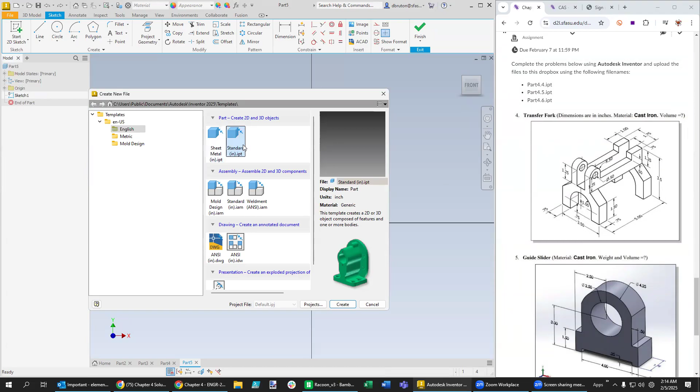So let's go new and English inches, and we'll start with maybe putting the origin right there in the center. So new sketch, select this plane.

And then we'll use the center point arc. We'll lock in at this point, but not click. We're just going to type in 1, that way we can arc over and zoom back until we click into that position.

So that gives a good starting point, and we might even be able to move this off to the side, because what we'll be able to do is maybe draw half of it, and then we'll take a mirror image.

So a way to speed up the process would be to make a line that goes from the top to the middle, like that, and then just make that a construction line we can use for mirror imaging. That's not the right one, it's this one over here.

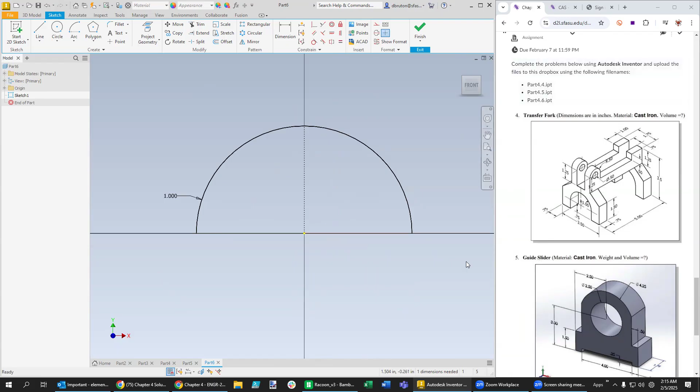All right, so we're going to use that to make a mirror image of this left side. You'll see what I'm talking about, because what we're going to do is roughly sketch it out. It's going to be a vertical line, horizontal. Then this is going to go up a bit and at an angle. And then what we'll do is go up a little bit more, over like this, down, and then we'll stop right there. Let's see if we can take a mirror image of that before we start constraining the part.

And so the way you do a mirror image of a sketch is you go up here to mirror, and it says select the objects you want to take a mirror of. And I'm not even holding control down.

It just highlights them in blue. And it says, what do you want to use for the line? And I'm going to say, select this one right here. And if you apply, it's going to put the other shape over like that.

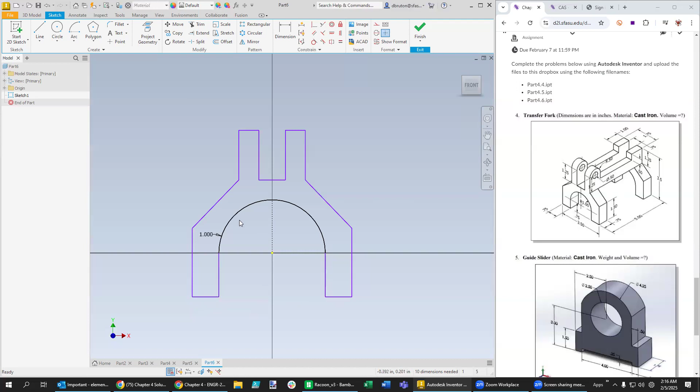So it kind of saves you a little bit of work, perhaps. And we're about to see whether it's going to keep these two equal to each other. So that is to be determined.

Now we already have this distance known from the top to the bottom as 0.75 for the sketch that's right there. And it looks like that lined up well, so that was a nice constraint to have.

We're going to keep these right in this area. I'm going to move this, make sure that it looks like that, move it over here to this side. I'll start adding some more things.

We got 3.5, and we'll see if some symmetry is maintained as we're doing this. It says 3, so we're going to go 3.5, and looks like it did maintain symmetry throughout the whole thing.

So then the next thing we're going to do, see this right over here, is maybe change the number of digits. So what you can do is tools, options, or probably better to be just the document properties under units. And we'll just use 2 places past the decimal.

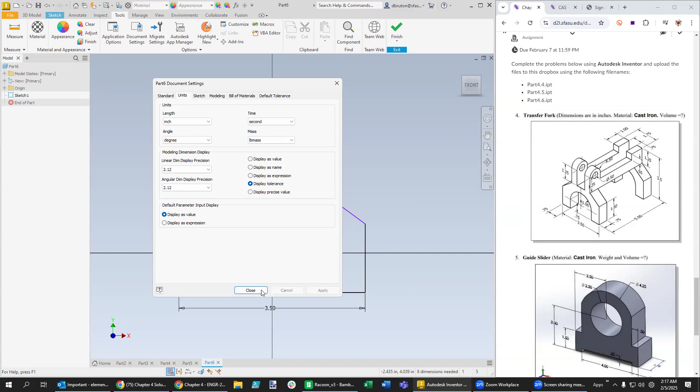Apply and then close. The width of this right here is 0.75. So it looks black, like almost like it needs to be that is fixed in size. Although, yeah, it looks like that one knew that it was exactly 0.75 already. I guess I got lucky on drawing that.

And then now you'll see this one is black because of that, and we need to make that one a 1.5 length line, as you see in this diagram.

Let's see if we got a gap in here, if that's known. Look way over there, another 0.75. So a lot of that repeating size there.

Now this is midpoints here because this is actually 2 lines. So I'm going to be careful maybe going from here to there instead. This time I only put 0.75 to widen that up a bit.

Then how wide are these here? 0.75 again. Look at how, oh wait, look at how you change one and the other one changes automatically. I just love that. All right, let's see.

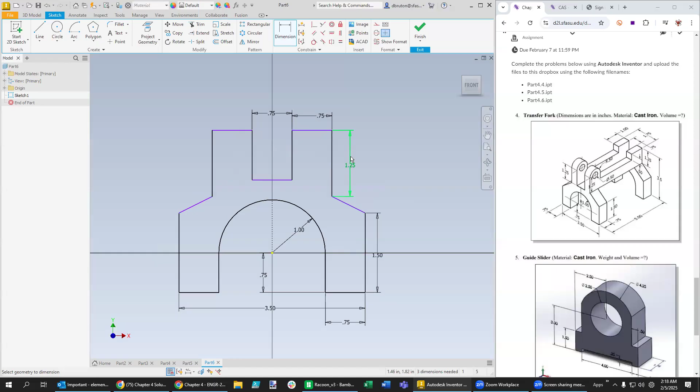We got some other things to do, like maybe the height on this right at this point, from there up to here. Okay, we'll go to the side for that, which is going to be 1.25. All right, we still got some things that need to be constrained.

We need a total height of 3.5, so we can go from here down to here, 3.5. And you just keep making constraints until you see all these purple lines go away.

Now what's happening here is that it's likely that this is not collinear with or coincident with that point. Let's see if we can find that over there. It does look like it is a depth of, if I'm not misleading myself on this one, it looks like this is also point 1.25.

So what we can do on this one is say that from this point to this point is also 1.25, or maybe we can do it the other side, that way it looks a little bit symmetric. This point to this point, also 1.25. All right, that looks pretty good.

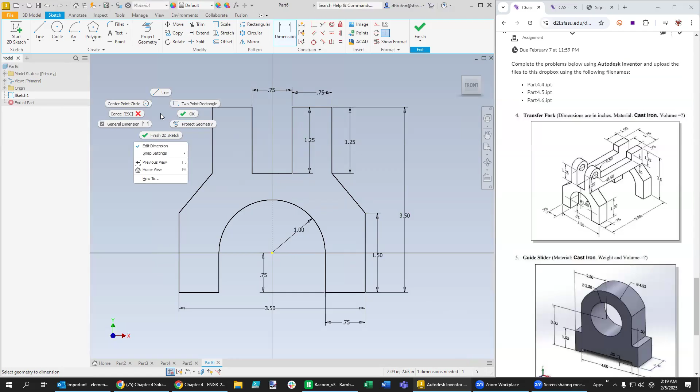It's still got one constraint unknown. We might just glance at that. It'll probably be something that comes out a little bit later. We'll say show all degrees of freedom, and you see this one right here could be moved side to side. So it's kind of maybe an artifact of there being two lines there.

So why don't we just go in there and delete the two lines that are there and just make one instead. So that's just an artifact of making a mirror image. And now we're fully constrained, which looks great.

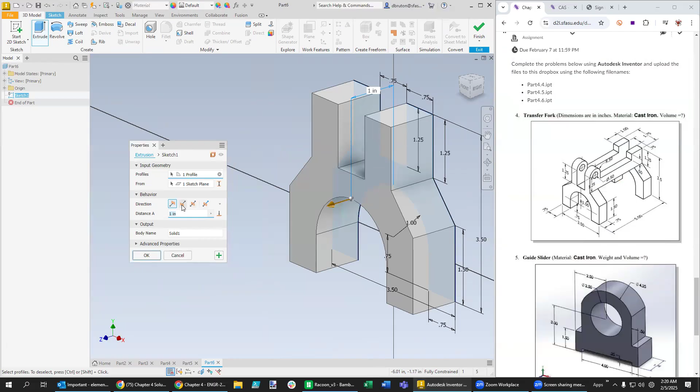And now we can extrude this 5 inches. Is that what we're ready to do? I think so. So it looks a lot more daunting until you start to just take a look at it and use some of these things like constraints and mirror imaging to achieve our goals.

So there's the 5 inch. Let's see what else we want to tackle next. We got a groove all the way down the center. So that looks good. So it looks like we only need to add this part to the top. So how about we draw on this shape right here.

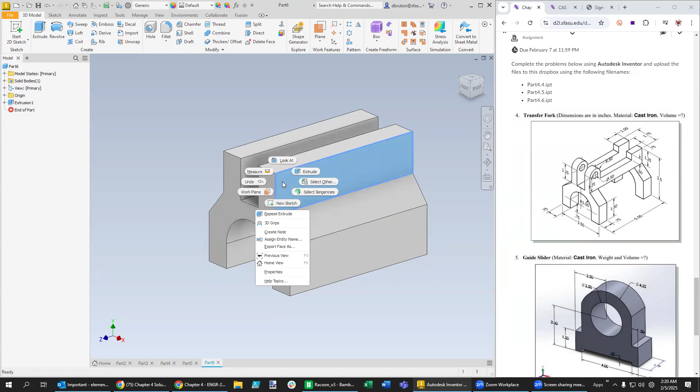So we'll do a new sketch and we'll just assume that we can add an arc to that surface. And so what we can do is do a center point arc. Just put it somewhere arbitrarily here. Start at the edge and then sweep over.

Then we need to add some dimensions to that. And the dimensions on that one is 0.5 if we're talking about the radius. Now let's see, I think that might actually be the diameter we're dealing with here. Is that the radius? Just wish it had the R in there. Let's just take a look at it here.

I wish it would show us the whole thing. It does seem to show like in the middle of this. So we're going to assume that that is correct. Now what we can do with that shape is actually extrude it all the way across. But maybe before we do that, we can cut a hole.

Let's just do it afterwards. Let me show you the value of extruding that across there because we'll just do a cut right through the middle. So what we can do then is just say extrude, and then you can look at the various options. You can say, for example, through all, and we really need to go the other direction, I think.

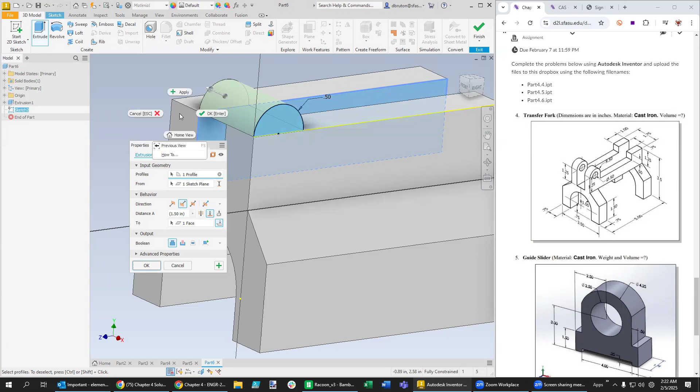But it really doesn't know what that is. Maybe we can go up to a surface, like we can go up to that surface. Or, as we've learned before, you might be able to right-click and select the plane back behind it. Well, that didn't work too well.

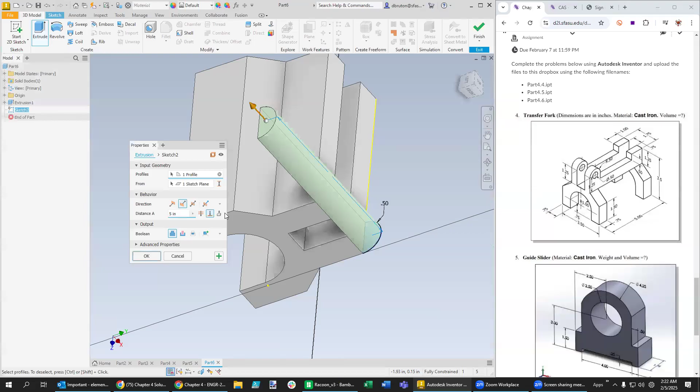So let's go ahead and extrude this. And we will orbit around to the other side. We'll say we want to go up to this plane. So pan over here. We want to go the other direction, and we want to stop on this plane right here. Then we can cut the rest of it off.

And I like how that merges it in pretty well. And then maybe we can find the center of this, but we may not even have to do that. Let's see if we can easily find it.

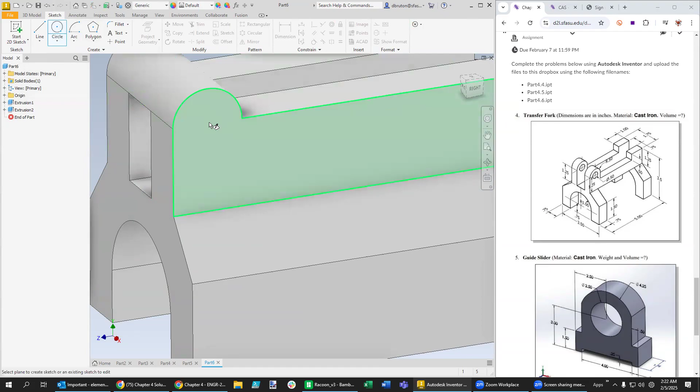We're going to make the sketch right there. That's the first thing. Then we can zero in on the area we want. Let's see if it'll help us find the center like that. And if it doesn't, you can just put the circle down here somewhere, right?

And then what you do is you select this shape and that shape, control click, and you just say let's make those concentric. It's easy enough. Then make it 1/2 of an inch in diameter.

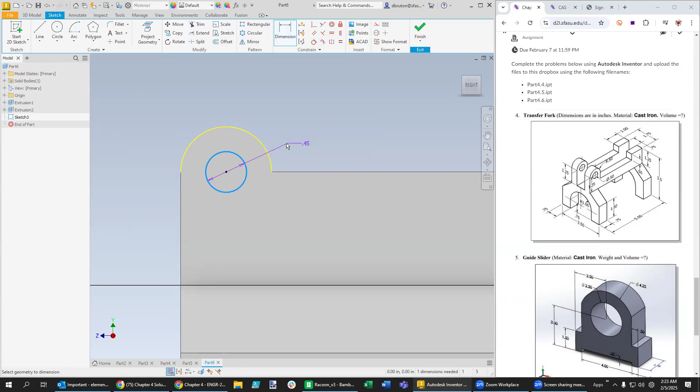Let's go ahead and extrude cut. And we want to go the other direction and cut. And we want to go through all, which is this one right here.

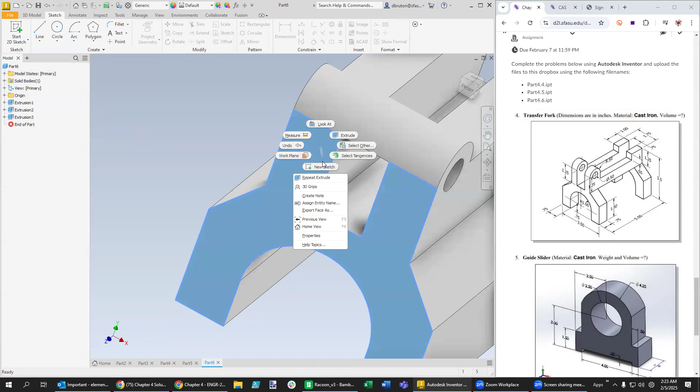All right, looking better. Then what we can do is go ahead and shave off the extra stuff that we didn't need. So you can right click here, say new sketch, then just focus in on this part.

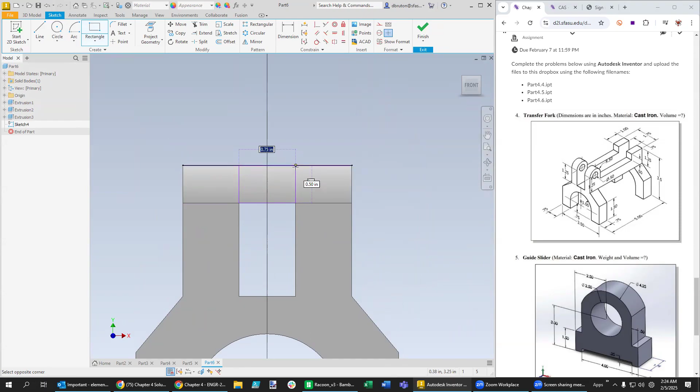What we can do then is just say let's grab a rectangle, maybe just a 2-point rectangle. Yeah, and we'll see if we can start right here, and then go up to this area right there. Now that is 0.75. It looks like it is the right cut for this.

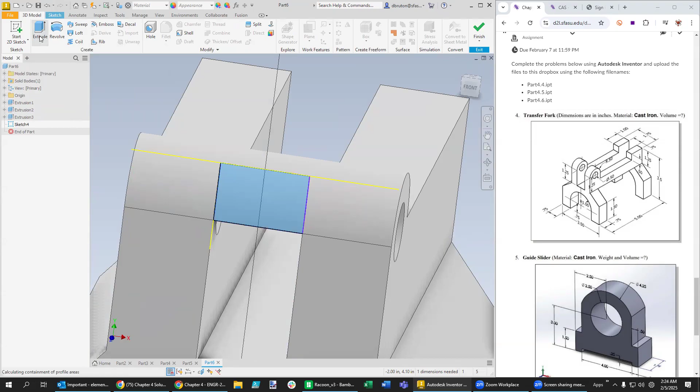It might be that it thinks this is not pixel size. Let's just see if we can proceed with that and get a smooth cut. Remember to click on this one, then glance on the inside to make sure there's no lines. This line is okay right here because it's a change in slope from the curvature to the flat surface.

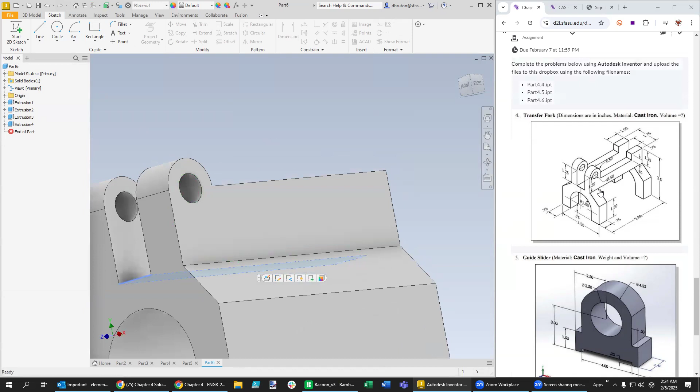Okay, that's looking pretty good. Looks like we got two more cuts to go, the cut over the top and also through the middle. For this one, we might try something different, and that is to see if we can look at a section of it, and then extrude it that way.

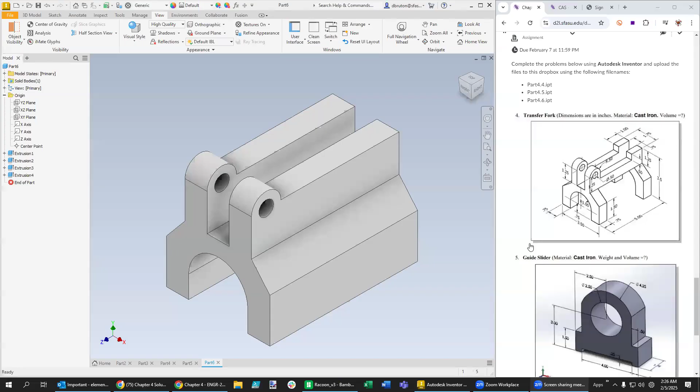Let's see if we can cut this in half with a new feature called sections. To make a section, expand the origin. We've been drawing on the XY plane, but let's select the YZ plane that cuts that in half. Then we can go under view and say half section view, and it cuts it in half.

Then we can just start drawing on this surface, on the YZ plane. Let's go ahead and click OK to that half section. We'll remove it in a moment. Then what we can do is right click on this plane and start sketching on it.

It looks like there's two cuts. You can see that one of them is essentially going to start at the tangent to this circle, so maybe a 2-point rectangle would be in order from there over like this to represent that top cut. We have a bottom cut that goes all the way through.

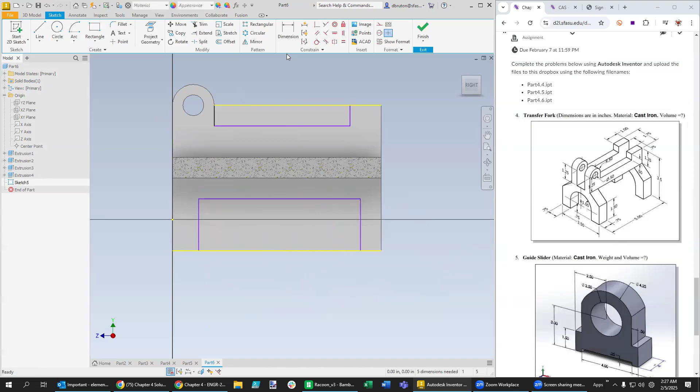Then we start making them with a known dimension, defining what those distances are. We've learned that that's 1. The depth of this cut, as you can see right here, is 1/2 inch. And somehow it knew that automatically - it's just kind of reading my mind on some of these things.

That's nice. Let's see if we can figure out the height from here all the way down. That would be the 1 inch plus the 0.75, so that's an easy calculation to make right here. We say 1.75, so that goes up to the bottom of that, which makes perfect sense.

Let's just see if we can move these around. Yeah, it looks like we could move those around. Now, what we could do is try to make it symmetric. There's several different ways of doing that - we could make a dotted line going right through the middle and make it symmetric. But let's just go ahead and measure from one end over to the other and make that 0.75.

So we go right here to right there, and we will say that's 0.75. Then we can also do the same thing over here. We'll use the symmetry tool on another part later. So now we're ready for a cut.

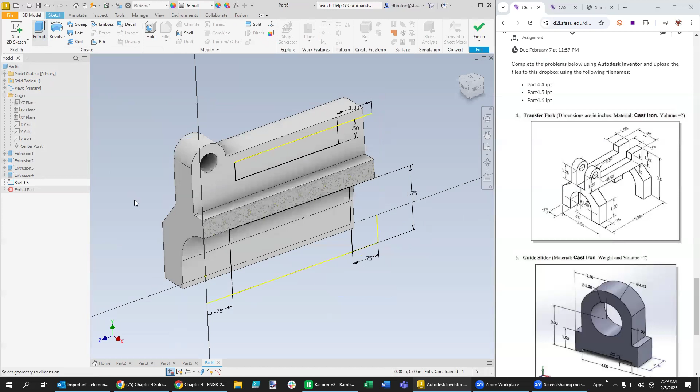Here I'm trying to be super efficient and do 2 cuts at once. Here I'm selecting cut - I want to cut that face and this one right here. But what I want to do is go through all, certainly like that, but I also want to go back in the other direction as well. So I want to make it a two-directional extrude.

So this one is symmetric - maybe that was asymmetric. Symmetric just basically means it's going to go all the way up to the same part on both sides. I think if you do asymmetric, it gives you 2 values here, but we're going to do the same cut in both directions.

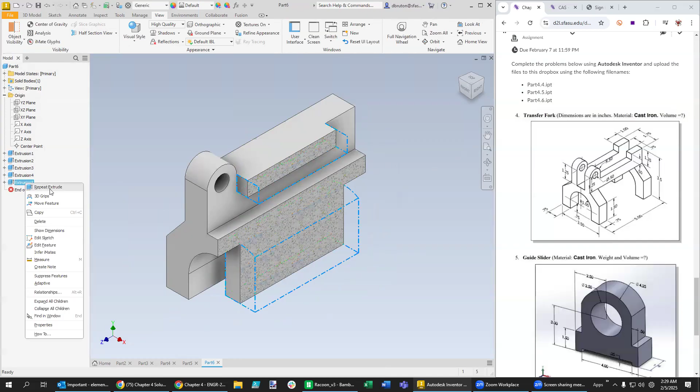At this point I wonder if we can - oh, I think I did an extrude. Let's go back to that one right there. I needed to do an extrude cut instead. Oops, don't need to change the sketch, we need to edit the feature. So right click on this and say edit feature. Now we can go over here and change it to a cut and make sure it looks right now.

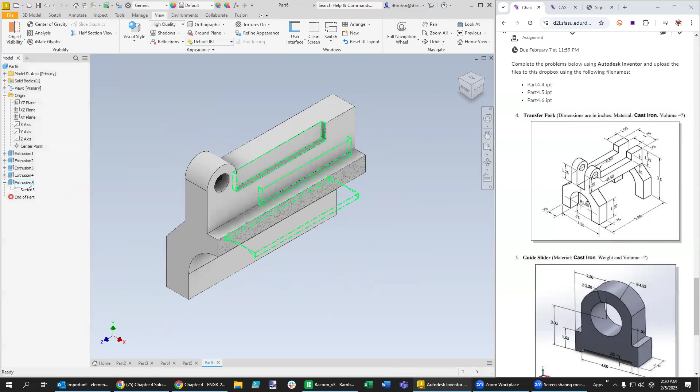I didn't go all the way through. So it's a nice thing about the feature tree over here in this model browser - you can start changing things and then roll them forward and backwards as needed. So make sure it says through all and also cut. All that clicking around made it a little bit random there for a moment.

And of course, this is not really a cut. This is just a view as seen by this marbled appearance on the inside. So now we will just go and delete that section view.

Are we done? The widths on these things don't really look exactly right. So let's go through and make sure I didn't make a mistake. See this width right here? Looks like it needs to be more narrow. It says 0.75 right there.

But I wonder if it was talking about that gap instead. Oh yeah, that's actually 0.75 here. So let's see if we can find the width somewhere in there.

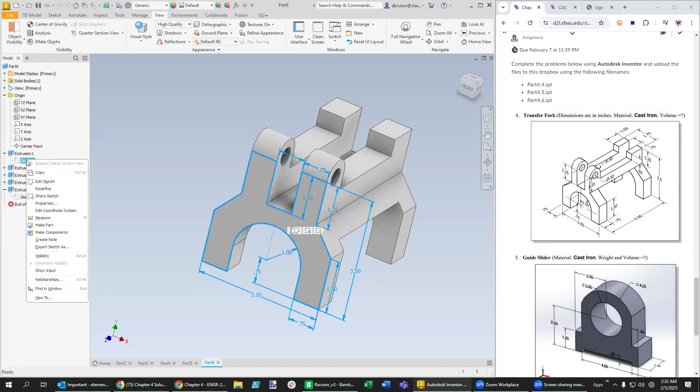This is one of the powerful things about the model view over here, is you can go back and make a mistake, go back and fix a mistake on the very first one. So I'm expanding the tree for extrusion, right click on this, to see if I made an error somewhere.

And you certainly see it right here. I misread this 0.75 to be this width right here, but if you look at the arrows, it's the gap width. So that right there is the one that is not correct.

And so now I'm starting to see my degrees of freedom. I can hide those like this, and then also put the correct measurement in, which said that if we go from this point to this point right here, 2.25.

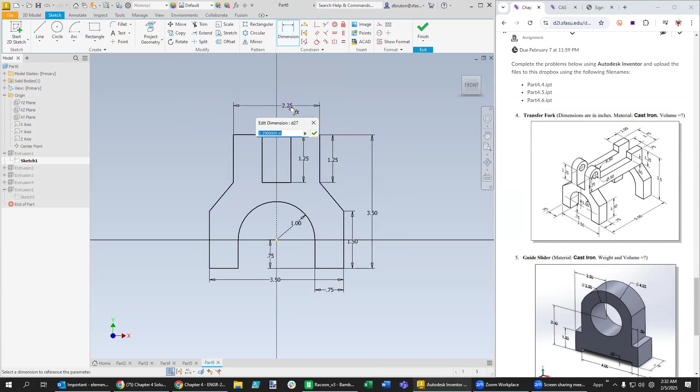The cool thing about this that I absolutely love is that you can just roll those changes forward, go over to your isometric view, and just look at how exact and precise that is.

Now it's not exactly right, because you see right here there is a gap all the way through, and here there is not. So apparently I made another mistake, but that's the nice thing about this.

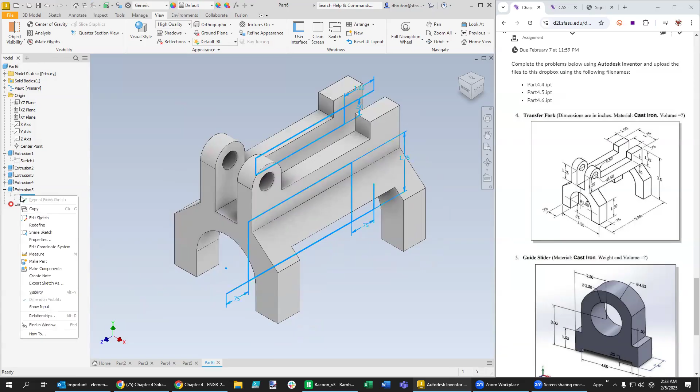You just go and find the sketch that has a mistake in there, edit sketch, and then you start to correct these things. Now what I could do is go back to this view again and see if I can get that slice view. Let's go ahead and finish that.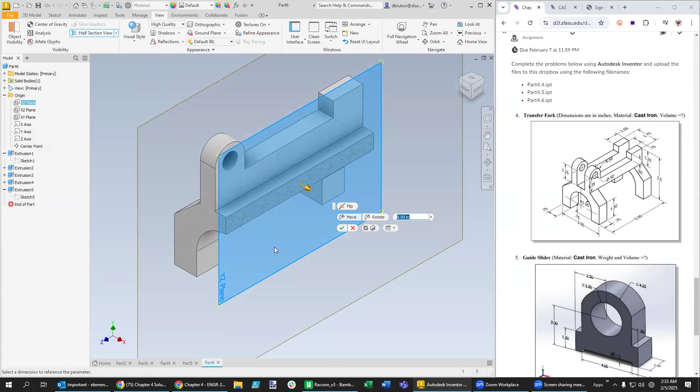And I think I was clicking on this plane, and then I said let's do a half section view. And we will leave it right there as we go back and change that sketch.

Now if we orbit underneath this, we're going to see if it really needs to be a cut all the way through. Okay, so yeah, it looks like I needed to go all the way up to this one here, a little bit up there, that wall underneath.

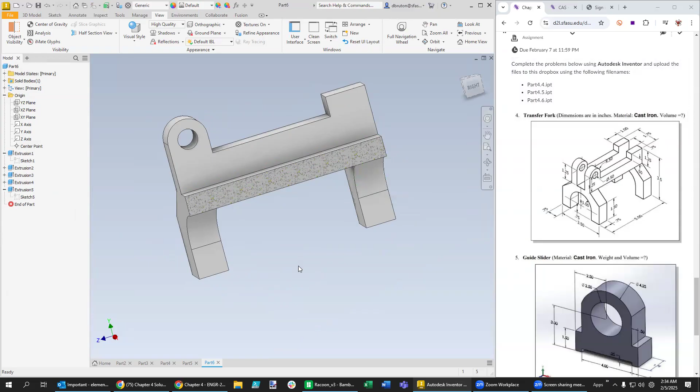And then in reviewing the sketch, I see this is 3.5 and that's 1.25, which means the height of this rectangle that I was cutting out in the middle should have been...

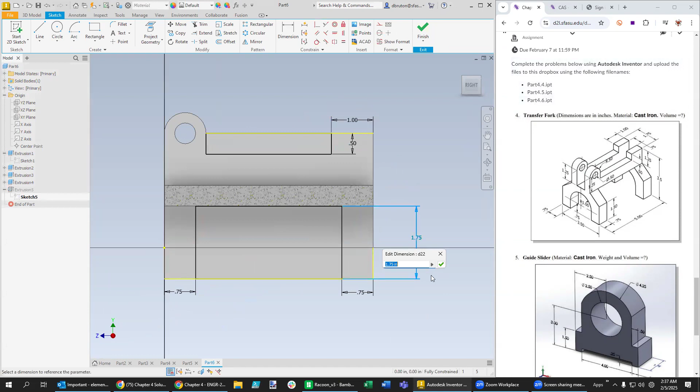2.25. So let's edit that last cut and see if that was the place where there was an error right there. So 2.25, and it's actually going to take off this bridge.

I kind of imagined there was a bridge behind there on this transfer fork. It looks like that's not correct.

Rolling those changes forward, then going over to our view and deleting that view. Now we have it looking exactly like that.

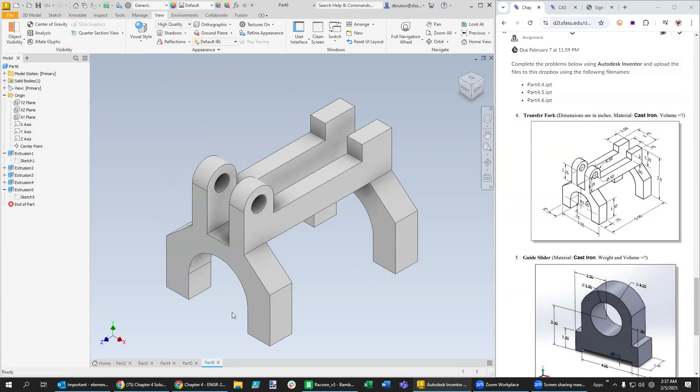You can orbit over the top, shift and scroll wheel, and see that that's not a bridge in the middle, it's just a gap. So this is our transfer fork, and just make sure you make it out of cast iron.

And to find the volume of this, we can go over to right click on the part itself up here, that we're going to save as part number, let's see, 4.4.

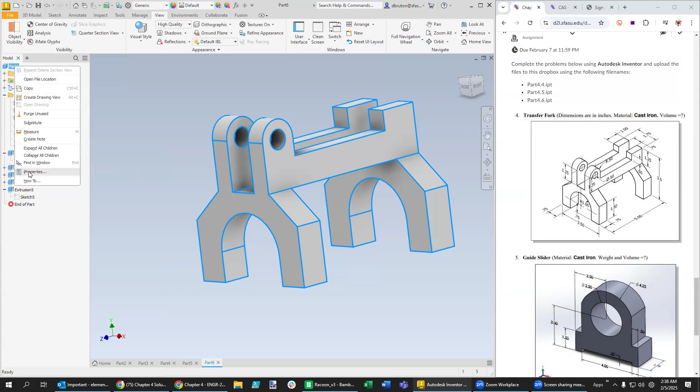And we're going to select iProperties at the bottom. Pull this over from another screen. On the physical tab, we want to make sure that it says cast iron under the material. Cast iron, okay, there we go.

And then what we're doing is looking for the volume. And so you'll see that as one of the physical properties right here. And it's basically 11.17 cubic inches. And over here it says relative error.

So you can actually increase the precision if you wanted to, but this is really good enough for what we want to do. It has enough significant figures for what we need.